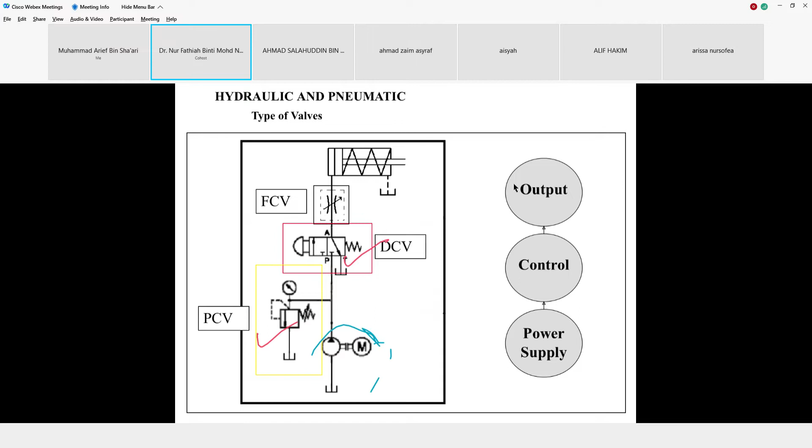Sekarang ni kita akan masuk bahagian control. Kita ada PCV, kita ada DCV dan juga FCV. PCV ni adalah pressure control valve. DCV is directional control valve. FCV adalah flow control valve.

Dan kita ada output, dalam bentuk silinder. Ini adalah contoh komponen sebenar of the valve. Kita ada flow control valve, DCV directional control valve, dan kita ada PCV pressure control valve. Alatan ataupun komponen valve ni awak jumpa dalam lab esok, maksudnya lab untuk minggu ni, untuk hydraulic punya lab.

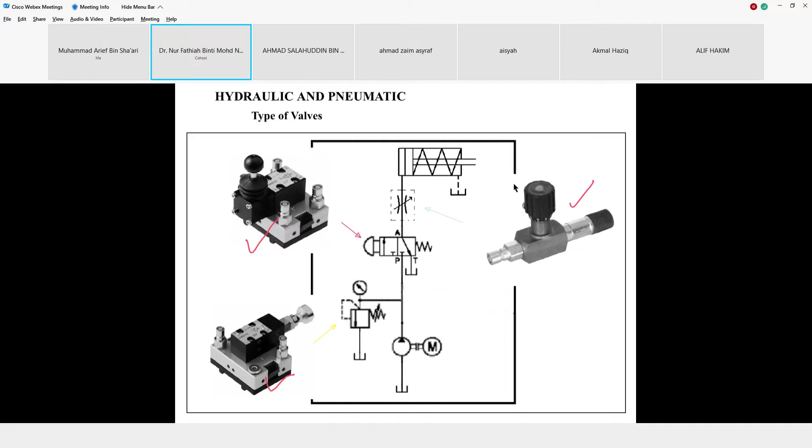Okay so the first valve yang kita akan masuk is on directional control. Directional control valve ni are components yang change open or closed flow path in hydraulic system. They are used to control the direction of motion of power of the components and the manner in which this will stop.

Okay so a basic DCV is a check valve. Check valve ni dia cuma allow flow pada satu arah sahaja. Gambar sebelah tu adalah diagram construction of a check valve.

Kalau nampak kat sini ada construction diagram of a check valve. Kita ada satu inlet dan satu outlet. Yang bola ni kita panggil dia sebagai poppet. Dan kita ada spring, dan kita ada tempat duduk untuk bola ni, which we call it as valve seat.

Yang B ni adalah grafik simbolnya yang awak akan jumpa dalam FluidSIM. Awak akan design circuit. Yang untuk segitiga ni adalah dia punya valve seat, tempat duduk untuk bola ataupun poppet.

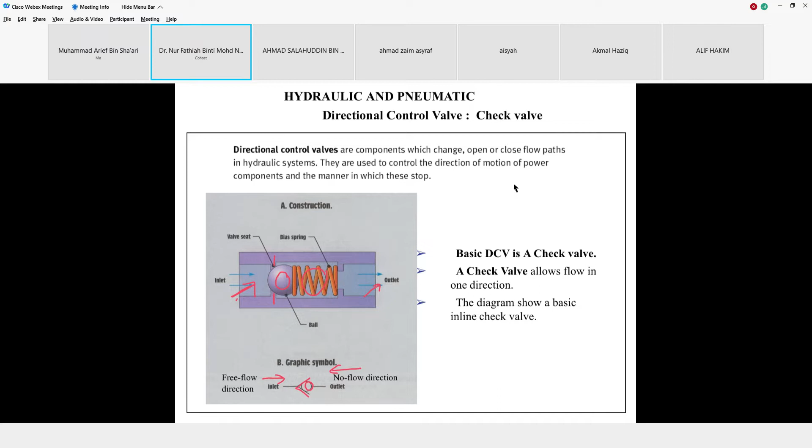Dalam free flow direction, bila kita ada fluid dan pressure dia tinggi, dia akan overcome the spring forces where the ball is located. Bila pressure tinggi, dia akan push bola ni ke arah kanan. Bila bola ni dah terkeluar daripada tempat duduk dia, dah terangkat daripada dia punya valve seat, so fluid flow boleh mengalir terus ke outlet.

Yang belah sini is no flow direction. Because bila kita ada pressure daripada fluid daripada arah outlet ni, dia akan sentiasa menekan spring ni ke arah kiri. Bola ni akan sentiasa berada dalam kedudukan dia, so the oil dia tak boleh pass ke arah sini.

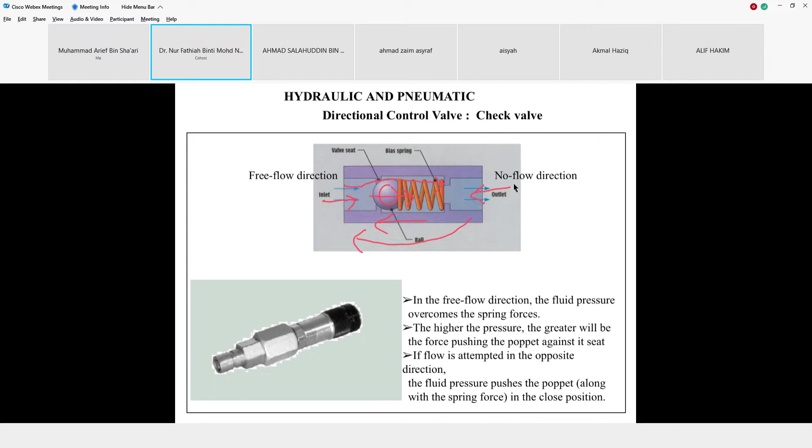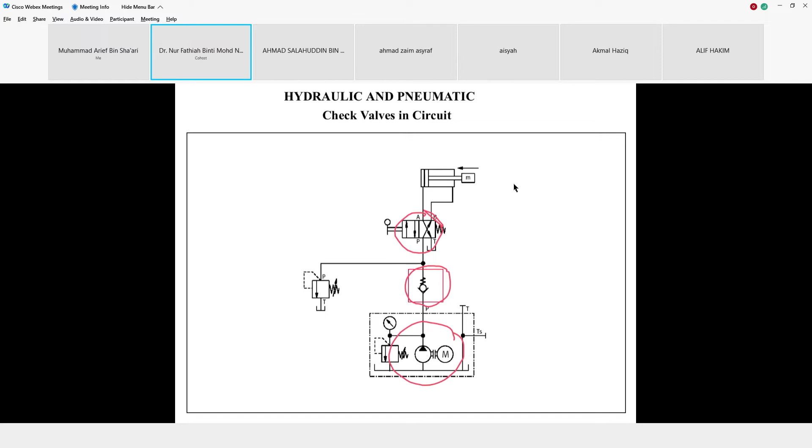Ini adalah penggunaan check valve dalam circuit. Kita ada power supply dan kita ada DCV. Check valve sini dan another DCV. Dan kita ada PRV. Dan kita ada actuator.

A check valve juga boleh digunakan untuk component bypass since it give the circuit line the lowest resistance to the line. Check valve ni kita tahu dia injap sehala sahaja. Kalau awak tengok diagram yang sebelah ni, untuk A kita ada flow through component dan B is component bypass in the reverse direction.

Maksudnya fluid flow daripada sistem akan terus melalui komponen dan masuk kepada awak punya sistem ataupun actuator. Because dia tak boleh lalu sini disebabkan this is a no direction.

Sebab bila awak ada fluid flow pada pressure yang tinggi, dia akan tolak bola ni. Dia sentiasa berada pada kedudukan dia, so tak boleh lah ada oil yang lalu. Dia akan direct masuk through component.

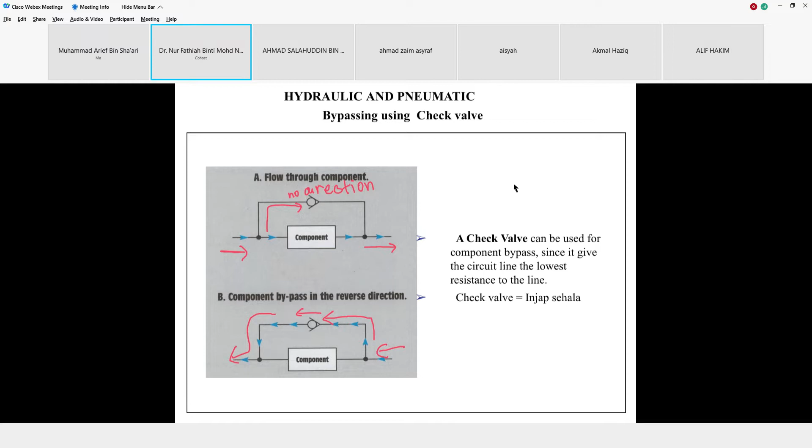Itu adalah bypassing using check valve. Dan another check valve is pilot check valve. Kita ada pilot to open check valve dan juga pilot to close check valve. Pilot line, dotted line kat sini is what we call it as pilot line. Pilot line ni refers to a line where it receives command from the fluid itself.

It always permits free flow in one direction, but permits flow in the normally blocked opposite direction only if the pilot pressure is applied at the pilot pressure port of the valve.

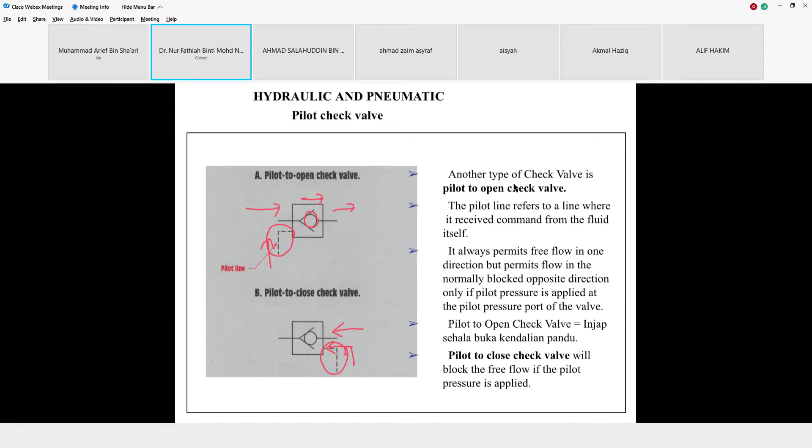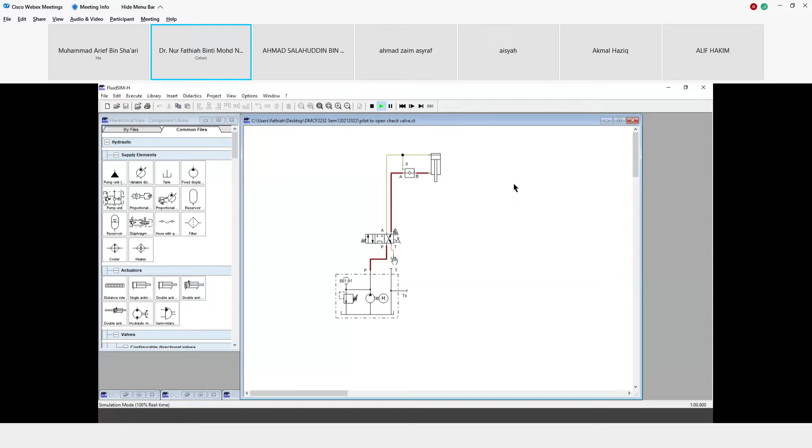So that is an example of a pilot to open check valve in a counterbalance circuit.

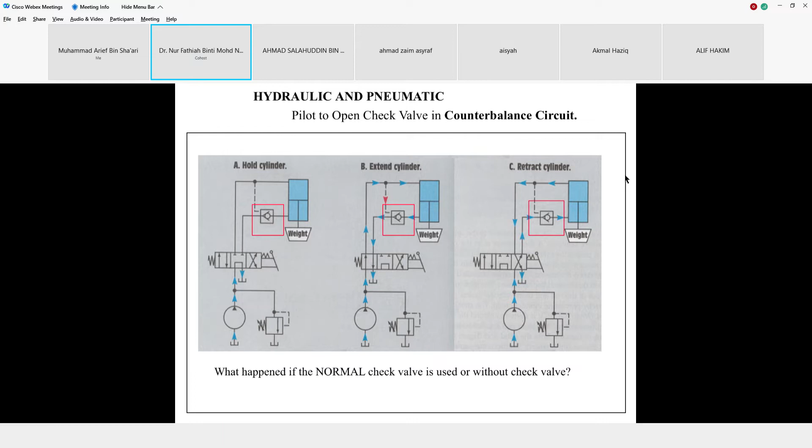Okay, so this is the same as before.

Okay, next we go into the shuttle valve. This valve allows two alternate flows to be connected into the line. So we have two alternate flows from P1 or P2. If the pressure at P1 is higher, it will push the ball to sit on the valve seat P2, closing that direction, so fluid flow will go into A. If P2 is higher than P1, it will push the ball to the valve seat P1, and fluid flow goes into A instead. This is the graphic symbol you will find in FluidSIM.

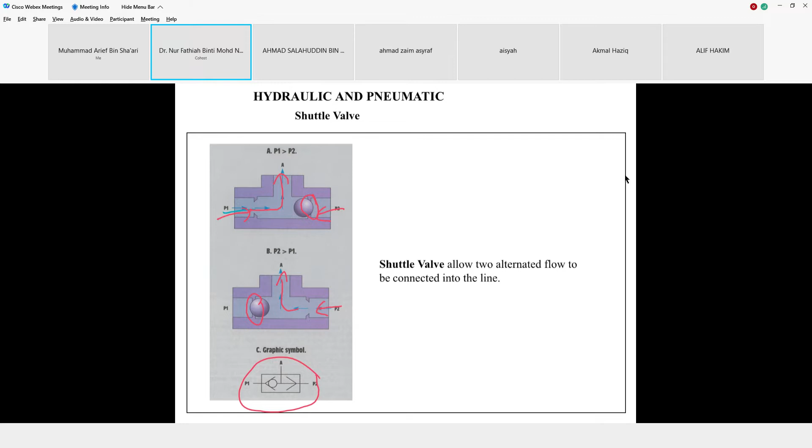Now we move into how to classify the valve for directional control valve (DCV). How do we classify it? Looking here, this is DCV. This is the first position and this is the second position. If this position is the normal position, it means the push button hasn't been activated yet, so no fluid flow can flow because it's in closed position. That's why it's shaped like this - block position.

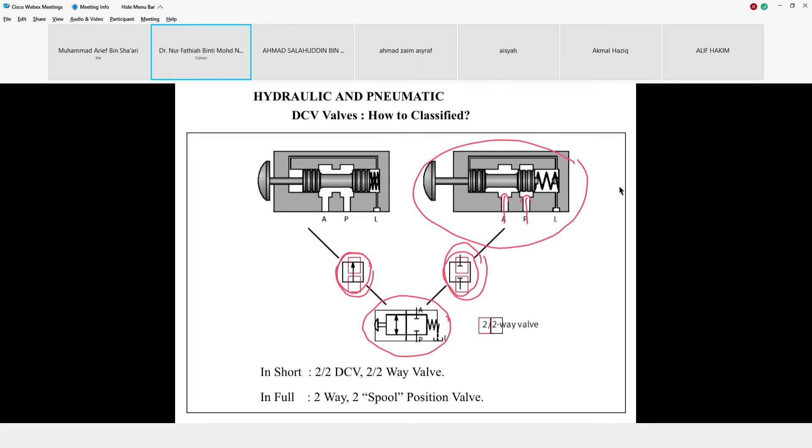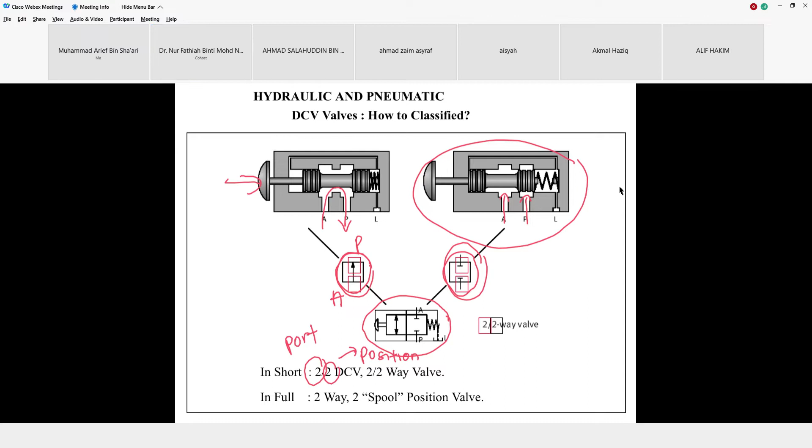If the second position is when the push button is activated, then fluid flow can flow from A to P. Since it has two ports, A and P, we call it 2, and the two positions beside it mean position. So we have two ports and two positions. In short we call it 2x2 DCV or 2x2 directional control valve or 2x2 way valve, or in full name, 2-way 2-position valve. I will just say it in short, like 2x2 or 3x2.

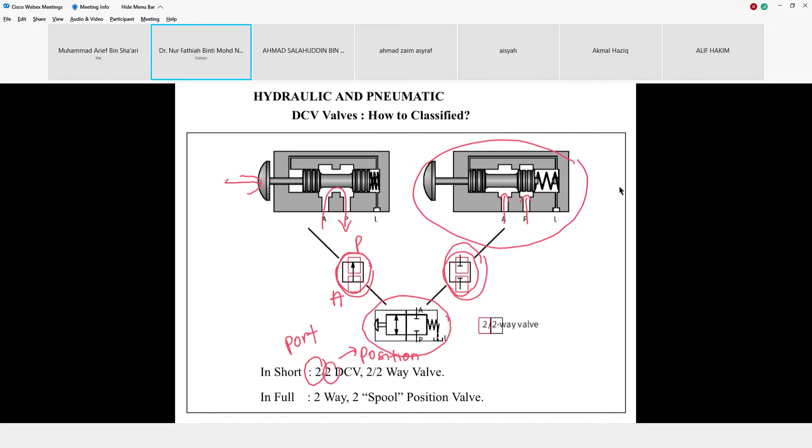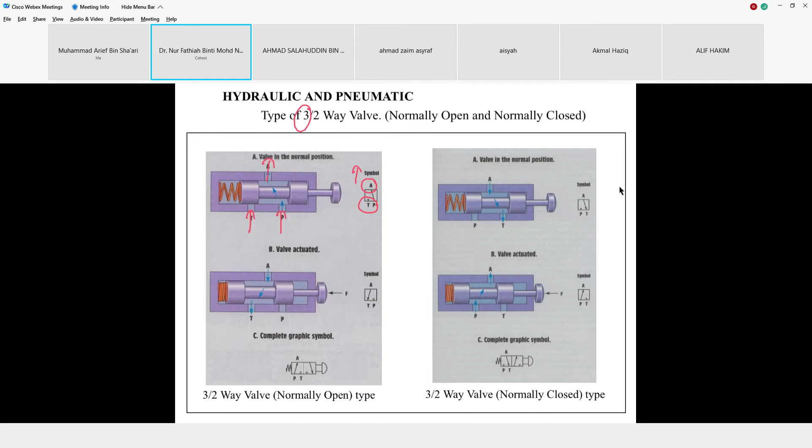This is when it's in the normal position, for normally open type. When the valve is deactivated - I mean when you activate the push button - P will be blocked, so only flow from T to A or A to T can pass. This is the complete graphic symbol, with push button, spring return, and the valve.

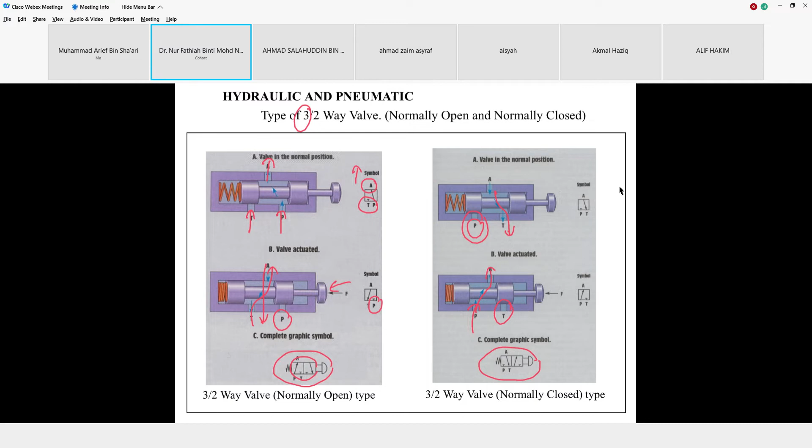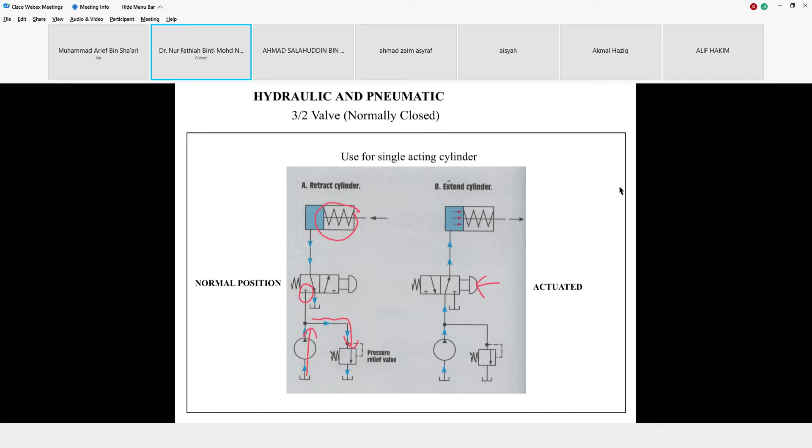Once you activate the push button here, the second position is activated. Fluid flow from the pump enters the cylinder, and then the piston will extend. So this is a single acting cylinder.

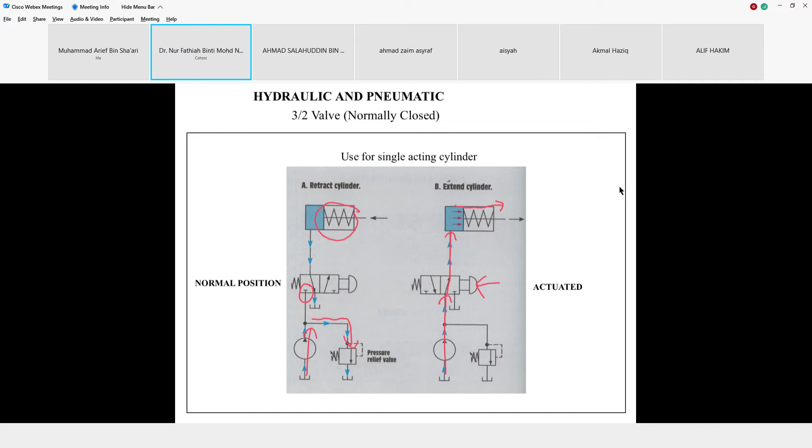So this is an example circuit for a normally closed 3 by 2 valve. You can try using FluidSIM and observe how the actuator moves when you activate the valve.

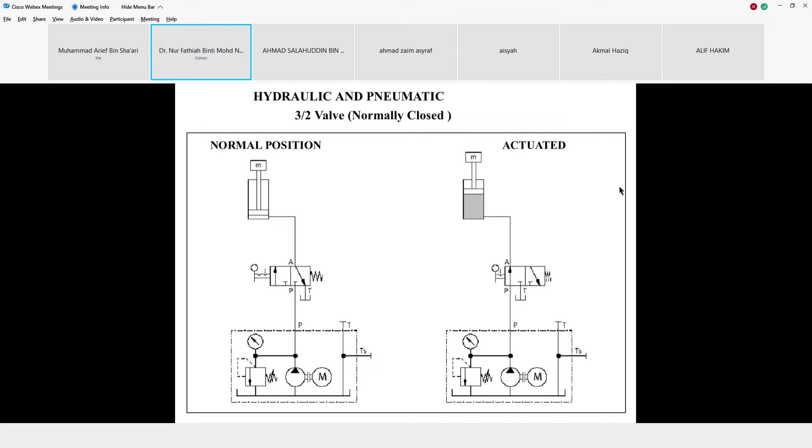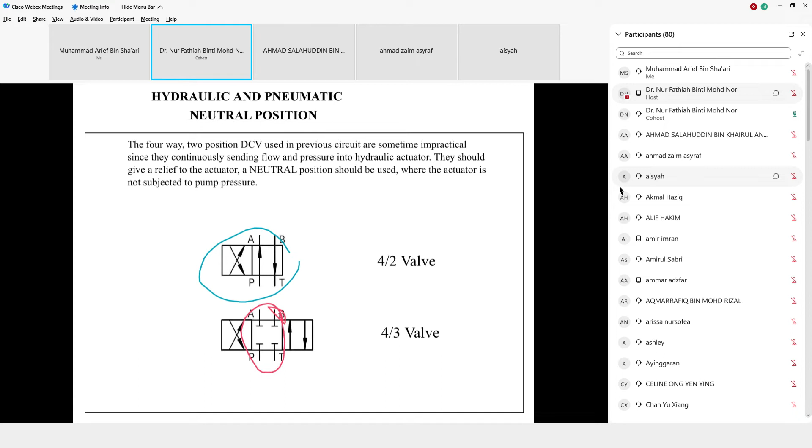So this we call a 4x3 valve. 4 ports - 1, 2, 3, 4 - and 3 means position. We have position 1, position 2, position 3.

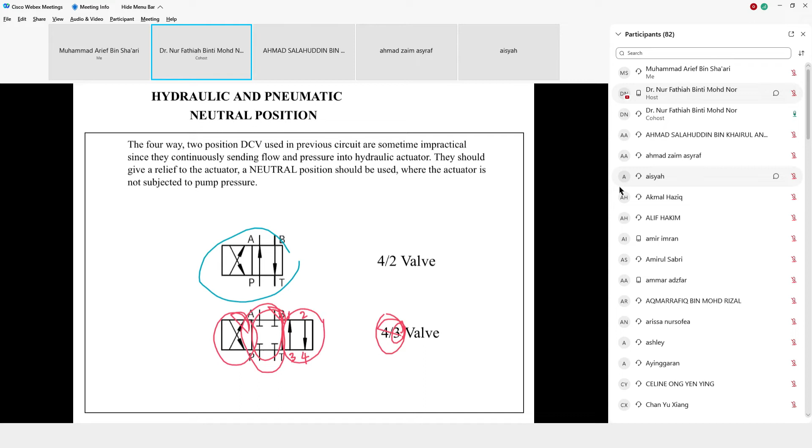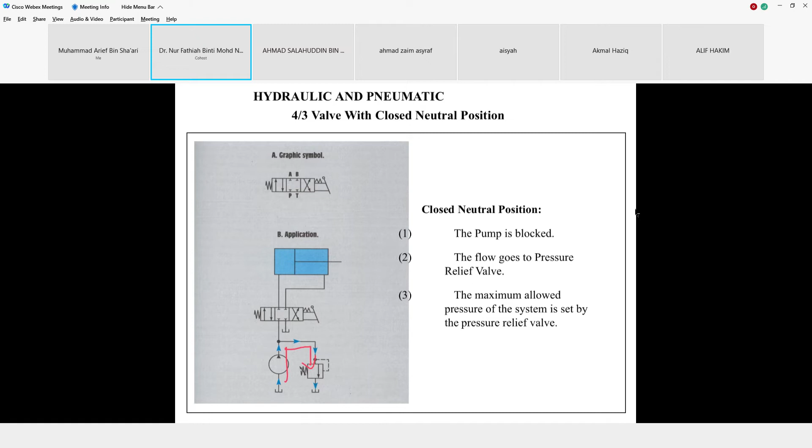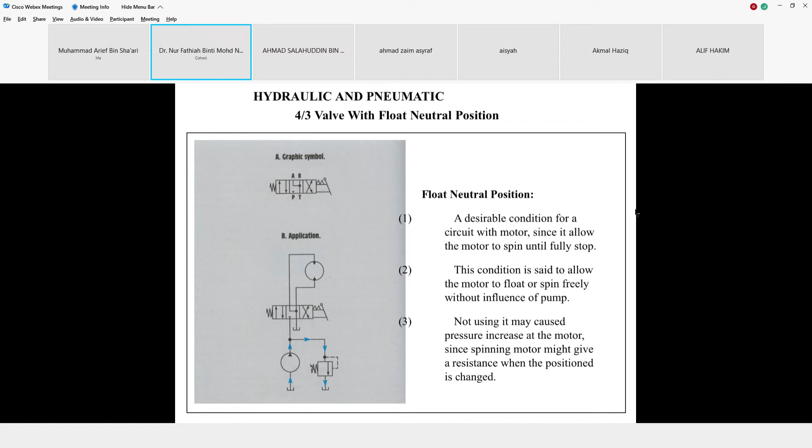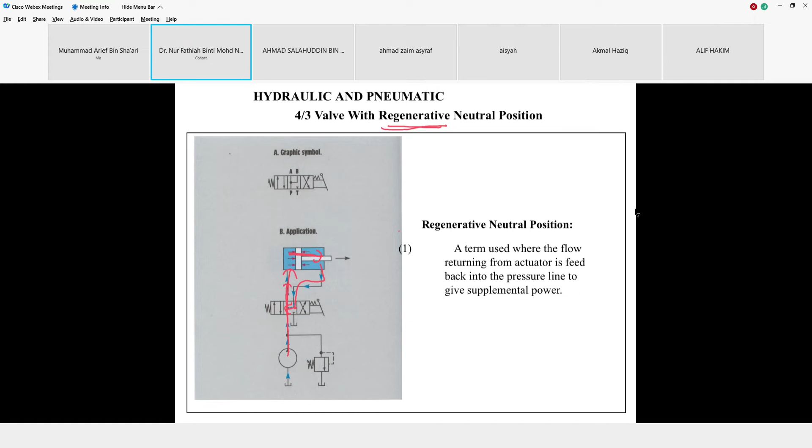Okay, so that is for the valve. Okay, and then kita masuk valve actuated, sama ada direct ataupun pilot.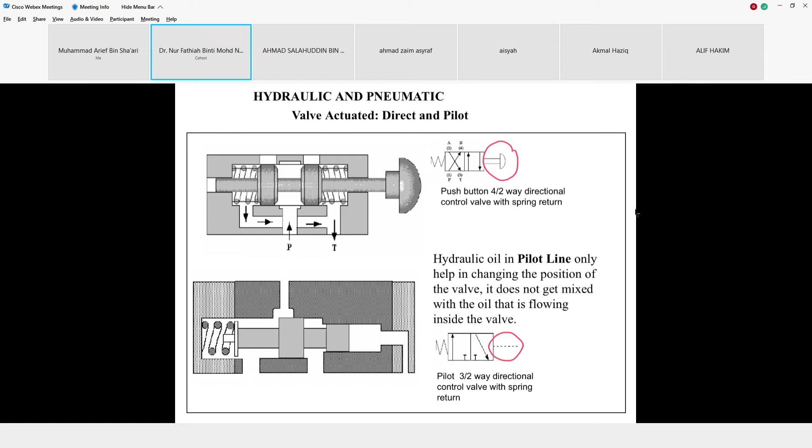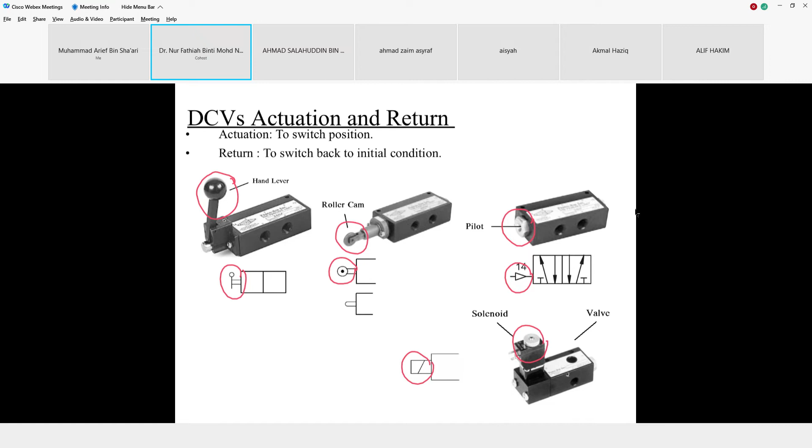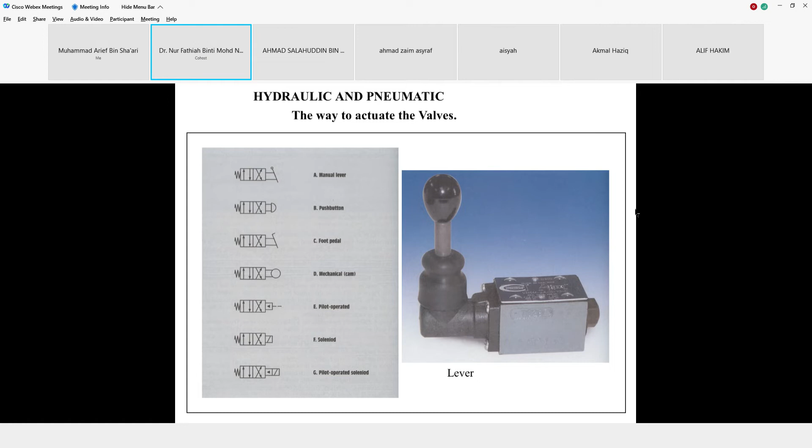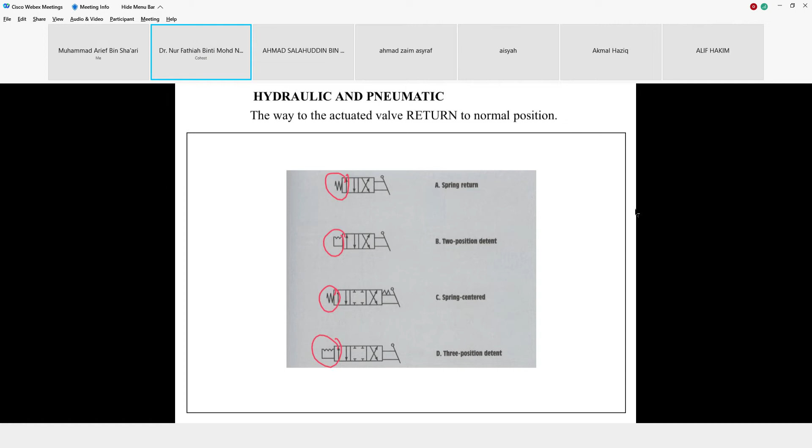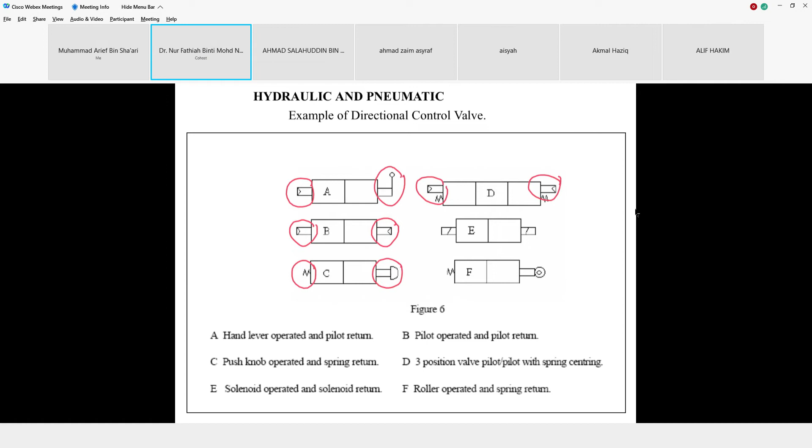Okay, untuk D kita ada three position. Okay, sebab dia ada three position kan, pilot operated with spring centering. Okay, and then for E, kita ada solenoid operated with solenoid return. And F, kita ada roller operated with spring return.

Okay, itu cara kita nak sebut lah untuk actuation and return of DCV. Okay, so itu adalah untuk DCV.

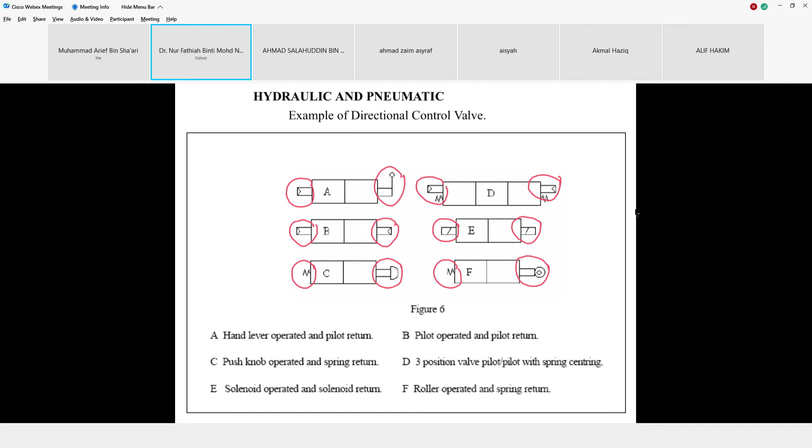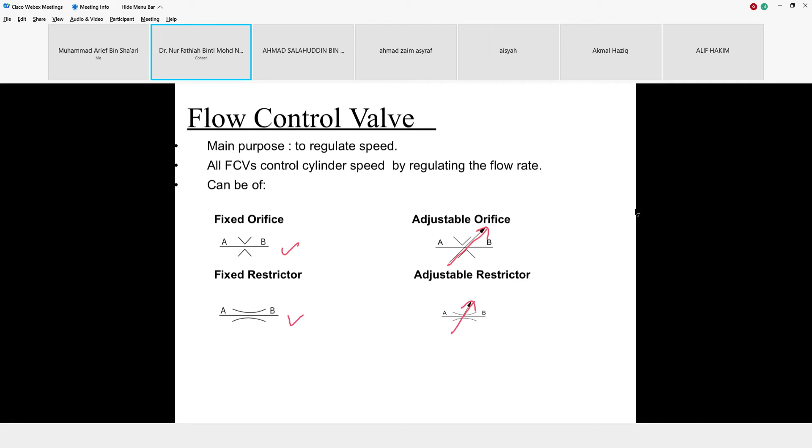Okay, beza kat sini untuk dia punya simbol. Untuk adjustable dia ada anak panah, maksudnya dia boleh adjust. Okay, kalau yang belah kiri ni fixed orifice, fixed restrictor, so kita dah fix lah berapa amount of fluid flow yang boleh masuk dalam sistem.

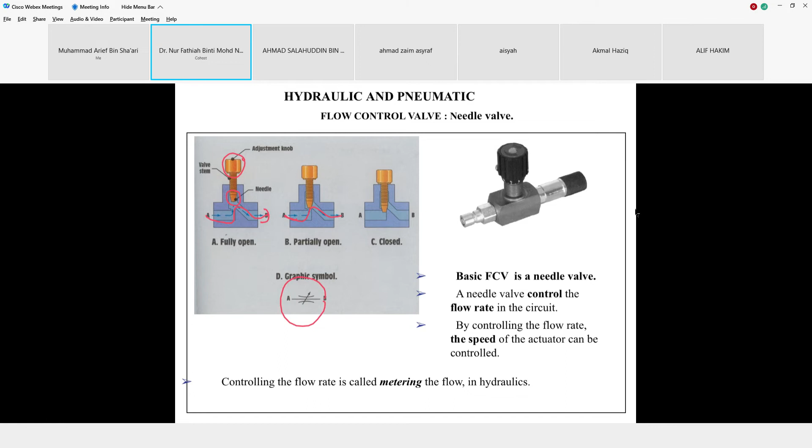Dan then kita masuk one way flow control valve. Okay, so bila one way control valve ni dia ada restrictor dan juga check valve. Okay, so untuk control flow direction, maksudnya bila flow daripada A nak masuk ke B, kita boleh control menggunakan adjustable restrictor tadi. Okay, kalau untuk free flow direction, maksudnya dia tak lalu restrictor, dia terus lalu check valve, dia masuk balik ke dalam sistem. Okay, so a one-way FCV is an integrated needle valve with a check valve.

One-way FCV gives a control flow direction from left to right and a free flow direction in reverse.

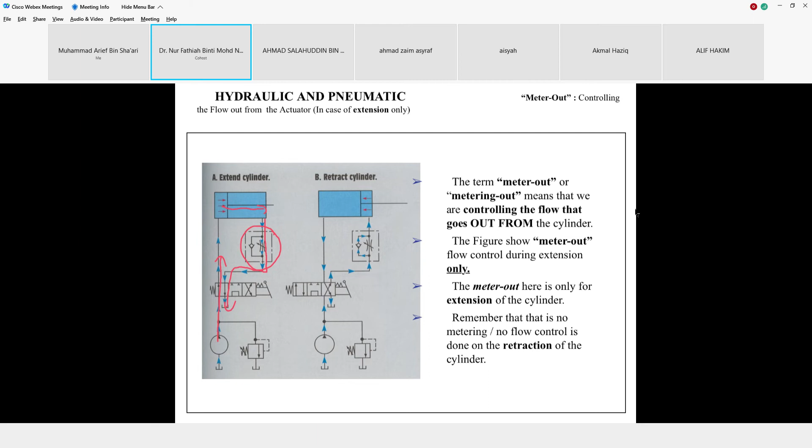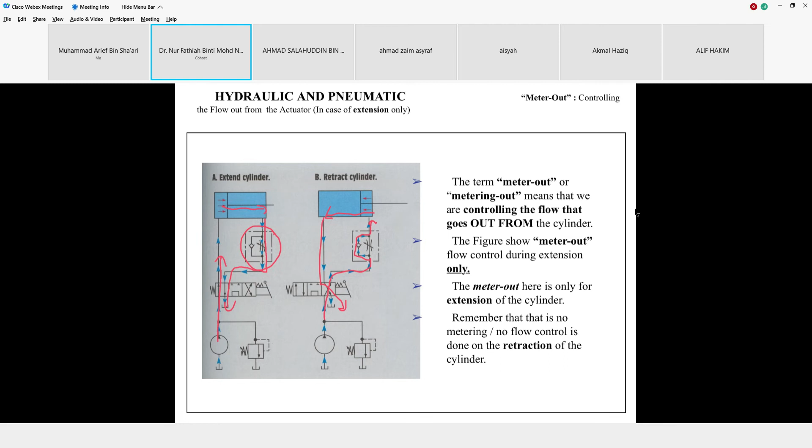During retraction, when we retract the cylinder back, it goes through the check valve and retracts back to the tank. So here we don't control the flow, we only control during extension. If we want to control during retraction for metering out, we place the FCV at the inlet of the cylinder.

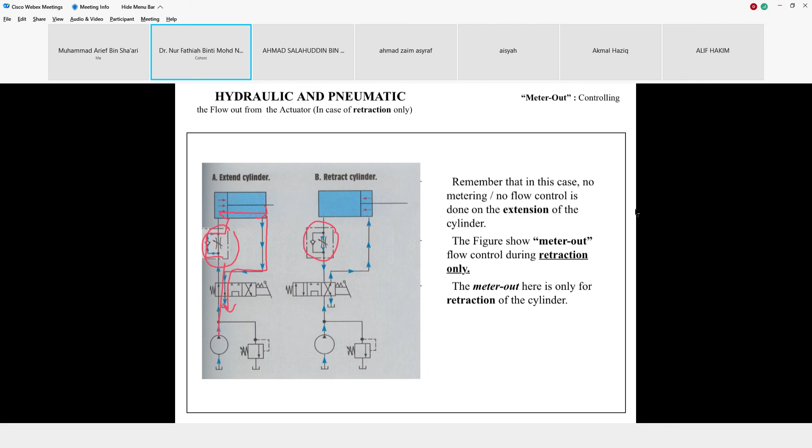During extend, we don't control the flow because this is metering out. So flow goes through the check valve and extends the cylinder. The excess oil goes back into the tank. We want to control the flow coming out of the actuator. Oil from the pump goes into the cylinder, so it retracts. The oil from the actuator, we control the flow through the needle valve, and it goes into the check valve. So this is metering out for retraction.

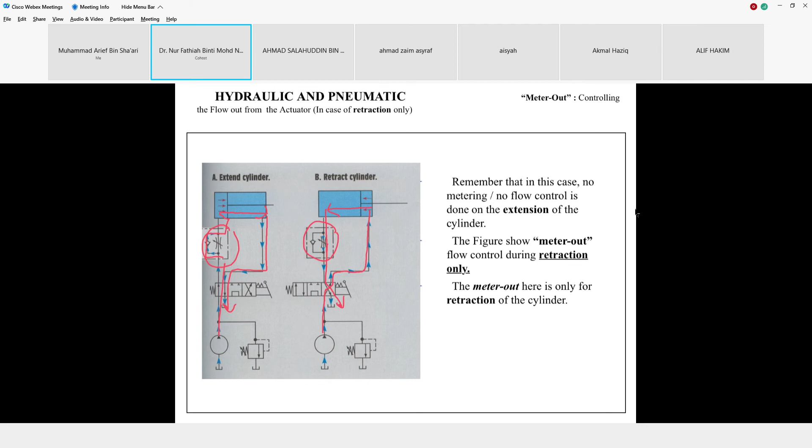So when to use metering in and out? It depends on the load. When we handle a resistive load, we use metering in, because resistive load is the load that resists the oil flow. But when we handle a tractive load, we can use metering out, since tractive load is the load that follows the oil flow.

Now, consequences of metering in and out. There is no consequence of using metering in to control a resistive load. However, by using metering out for a tractive load, it can cause pressure intensification. This pressure intensification is fine if it stays within the operating pressure limit, but if it goes beyond the pressure limit, your actuator will be damaged. So the positioning of metering in and out also differs depending on the position of the load, whether it's upward, downward, or horizontal.

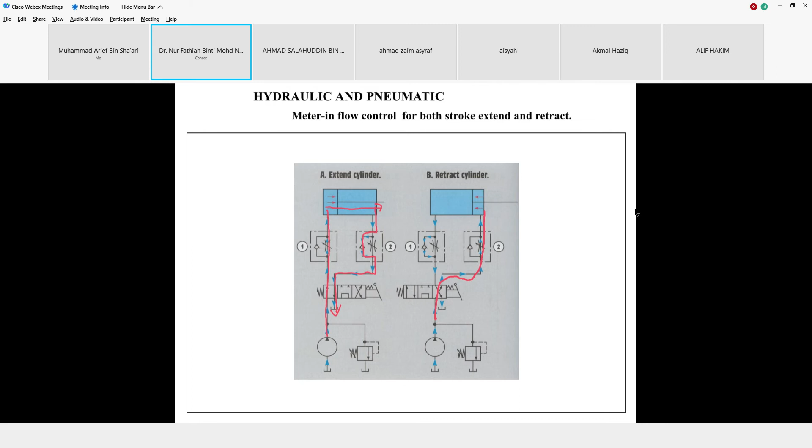We want to control the flow going into the actuator. So it passes through the needle valve and then extends. When it wants to retract, it passes through the check valve and goes back into the tank. During retract, we control the flow going into the cylinder because this is metering in. Then it retracts, exits through the check valve, and goes into the tank.

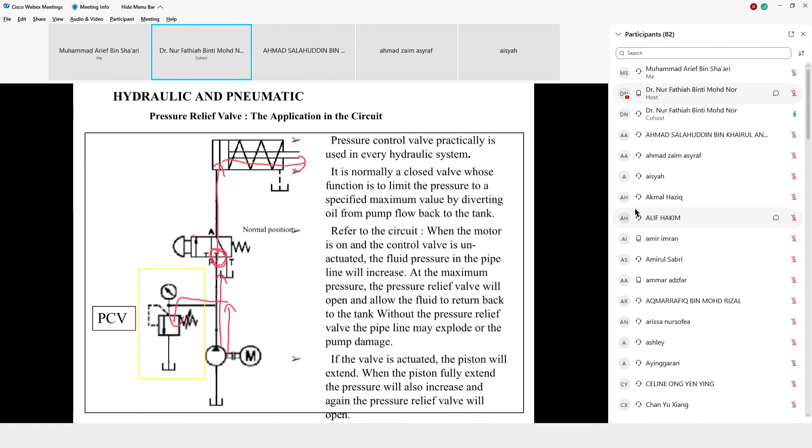Okay, so untuk PCV kita ada 4 jenis variation. Kita ada pressure relief valve, sequence valve, unloading valve dan juga pressure reducing valve.

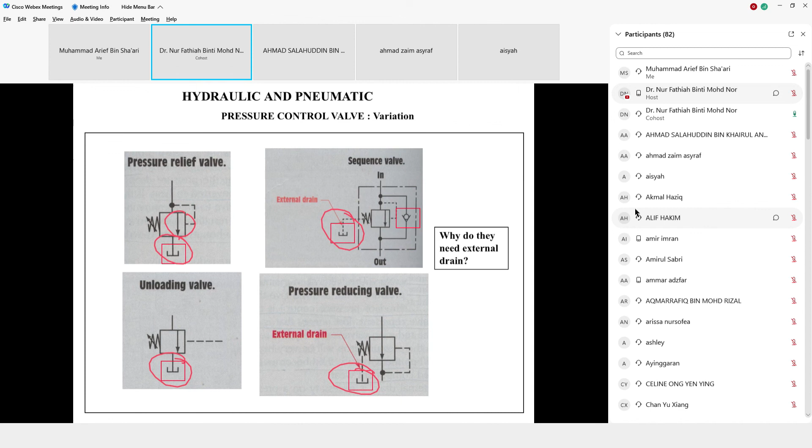Kalau awak tengok dekat 4 diagram ni, kita ada external drain. Kegunaan external drain ni adalah untuk yang excessive oil tadi balik pada tangki lah, sebab takkan kita nak simpan dekat valve kan. So dia mesti ada satu tangki untuk kita letak balik oil tu. Untuk diploma kita hanya masuk pressure relief valve dan juga pressure reducing valve.

Untuk pressure reducing valve, kita ada adjustable knob kat sini, kita ada drain ataupun tangki dan kita ada poppet. This is spring dan this is restrictor. Bila ada high pressure fluid flow masuk, kita ada spool, dan this is the reduce pressure lah.

High pressure oil dia akan masuk melalui restrictor. Bila dia masuk restrictor, because dia high pressure kan, dia akan lift poppet ni. The pressure is set by adjusting knob tadi kat sini behind the poppet. Lebih oil tadi akan masuk ke dalam tangki.

Pressure drop tadi through the restrictor, dia akan produce force imbalance pada spool. So dia akan bergerak, spool ni akan bergerak, moves partially to block this port. Dia boleh reduce pressure at port B.

Tapi if pressure dekat port B ni rise ataupun tinggi, leakage tadi untuk oil tadi akan masuk ke restrictor, dan kita regulate pressure tu. Yang spool kat sini dia akan move further untuk tutup port ni, so dia akan block bila high pressure sangat. If the pressure on port B ni drop, the leakage drop dengan pressure difference drop, so spool ni dia akan bergerak untuk open port B, dan let oil flow masuk ke port B.